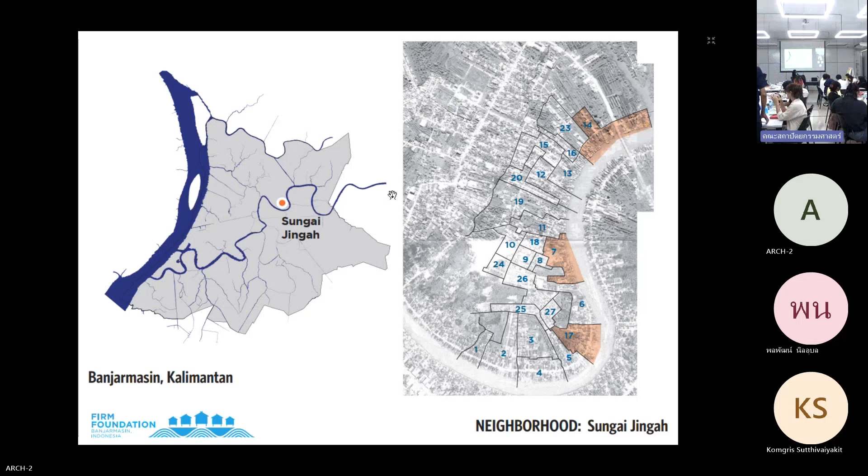The project is about how to build an amphibious design for the public space. The very important part of this process is participatory design, how the community can engage and contribute their ideas.

I became the lecturer assisting this project in 2010, when my students tried to submit it together with a professional architect from MIT in the USA. The method is quite a long process, because on day one, when they go there, they do key problem identification, with the neighborhood of Sungai Jingah.

How is the method? They sit together and discuss. What are they doing? They ask if there's anything interesting in Sungai Jingah, if they're facing problems there, and many questions related to how they manage their neighborhood, particularly for the public space that will exist near the river bank.

They try to find the key problem. They don't meet with just one community, they meet with several communities sitting together to try to identify the key problem.

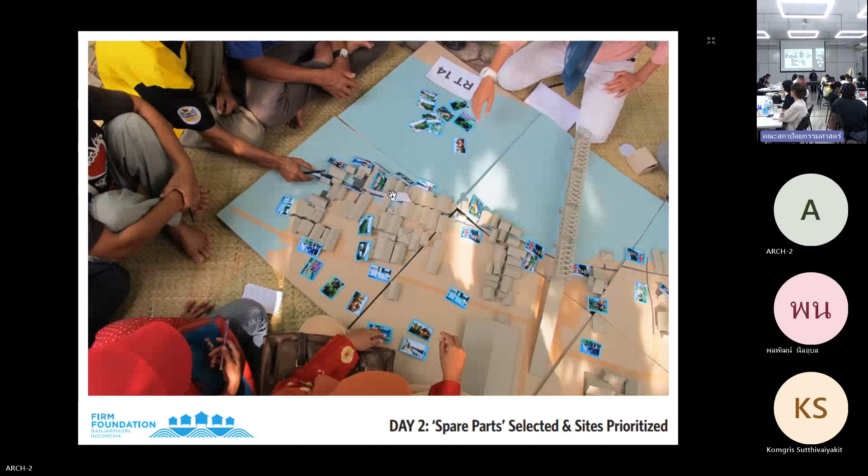Another interesting part of this process is they develop an interactive maquette. Why is this important? Because according to my experience with long-term community participation, when we try to engage the community to reveal their ideas about the neighborhood, it's very fun if you as an architect or urban or rural designer try to develop a maquette or model in three dimensions.

They will reveal everything through stories. It's hard for them to write it down, but when we build this kind of method, they can talk, probably not just one day, but two days. This means your skill as an architect student to develop the interactive maquette is very important.

Because it will be fun and playful, you can put the maquette and the model exactly at their location and try to trigger them with pictures, and they will talk all night long.

We call this the spare parts selected and site prioritized. Without this, I think they won't really know what the priority or problem is that they can really help with. After this, they talk about which is the first priority, second, third, according to them, and they can point it out on their maquette model.

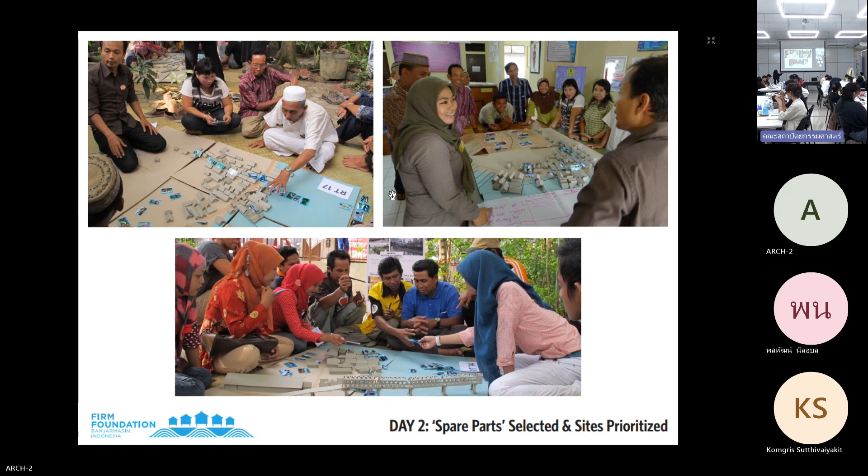The spare parts selected and site prioritized make it easier for them to speak through the model.

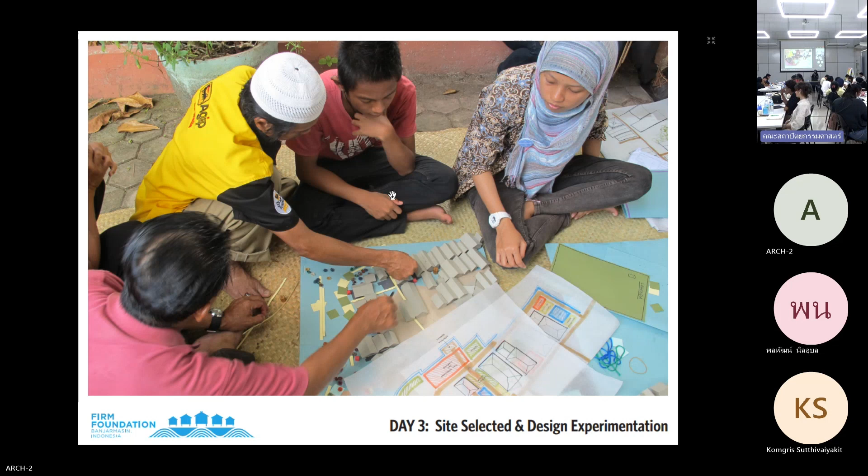Still on day two and day three, we move further with drawing. We let people draw what they really have in mind on day three, for the design experimentation. So we give them markers, give them paper, and let them try drawing by themselves.

This means we just act as a facilitator, as an architect or urban designer or whatever expert coming to their neighborhood. We just do it as a facilitator, because it will be easier, since the one who lives there is them, not us. We just come there and try to build something.

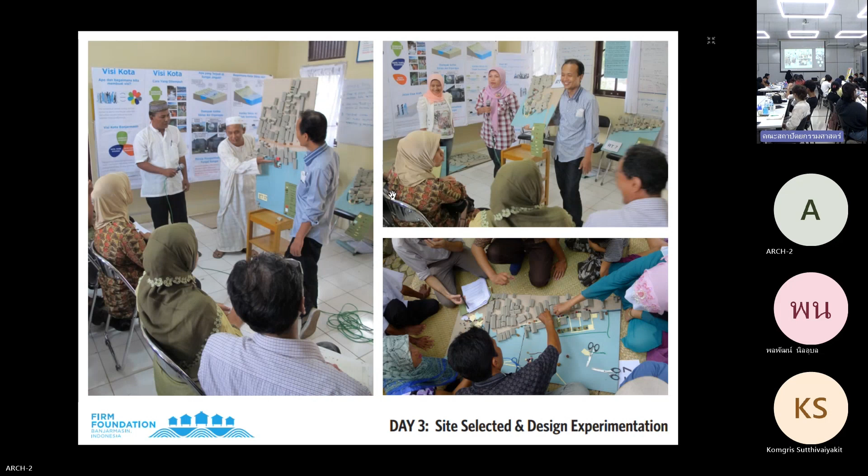It is also not ethical otherwise. The one facing the problem is them. We try to dig into the information about what really matters to them. This is the thing we need to do.

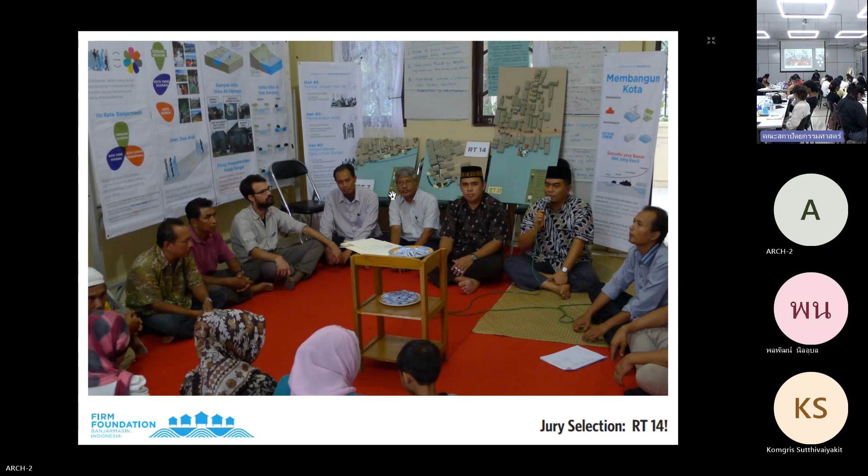After all the problems, they got the priorities in each neighborhood, and then the facilitator tried to explain to all of them, and when they talk together, it's very helpful for them to choose which area along Sungai Jingah is really suitable to build the public space.

Here the RT14 has become their site selection from the discussion with the community, because they feel this area is strategic since it's located at the junction. It's easily accessible from everywhere, and this area can be seen from the main bridge and the short bridge.

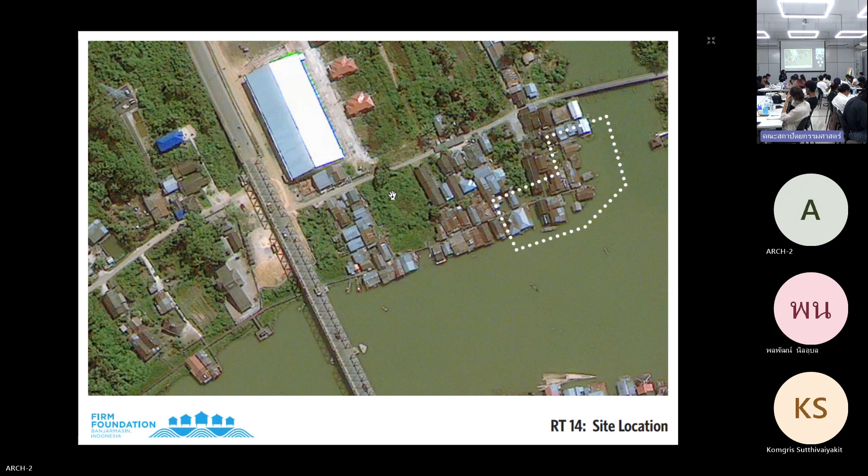What they want to do is build public space, since they lack it, using the approach of amphibious design method. They built this site selection through community participation.

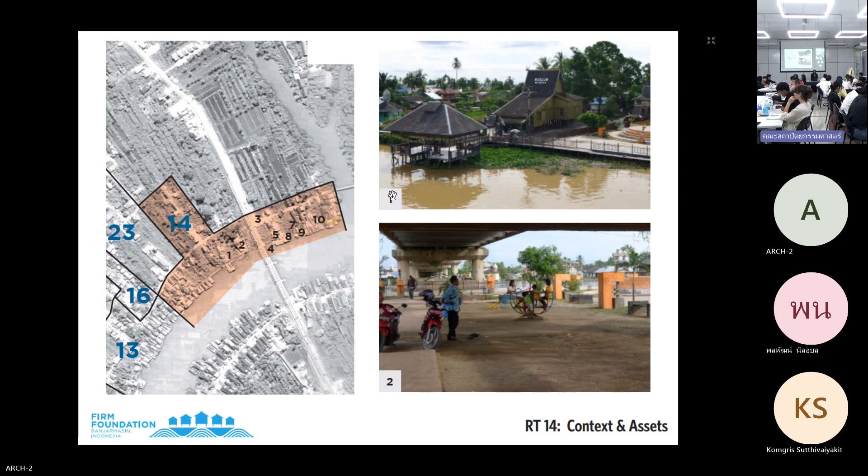Why? Because the context and assets in this area reveal a lack of public space. Most public space is not inside the water, meaning at ground level, and it doesn't cover all the neighborhoods along this river bank. Therefore, number 10 becomes a very strategic place to build the common space, and the area coming up for selection.

Here the potential they have, number 3, is about the garbage and the flooding - not actual flooding, this is in front of their houses. When the water level rises, the area in front of their yards becomes like a small pool of water, which is not healthy. So they have this kind of problem.

The fourth asset we can see from the mapping: they have a road made from wood, and they put many things from their houses onto it. This is common, I think, not only in Indonesia but also in Thailand, because the houses are not only for living but also for home-based enterprise and informal sector activities for daily life, part of which spills onto the street.

Achan has done very good research on informal street activities. They put all the things of street vendors also in front of their houses, even though the space is not big enough.

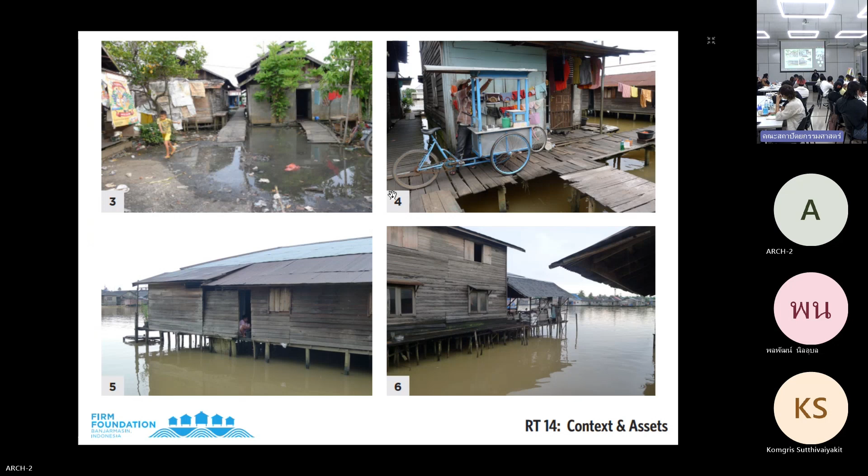The other things that emerged from this process: they did the discussion and mapping, and could point out which area has potential for public space. Most of the time they pointed here, where they lack common space for children - each neighborhood can gather, but it's very far away from the yard. So in this area, there's no position at all for public space.

After that, they found several key problems in this RT14: garbage in the rivers and roadside, helicopter toilets - do you know helicopter toilets? It's like a toilet with a septic tank, but they just dump it into the water, we call it a helicopter toilet. Also no PDAM along the river, broken boardwalks, and no port from the river to enter the community.

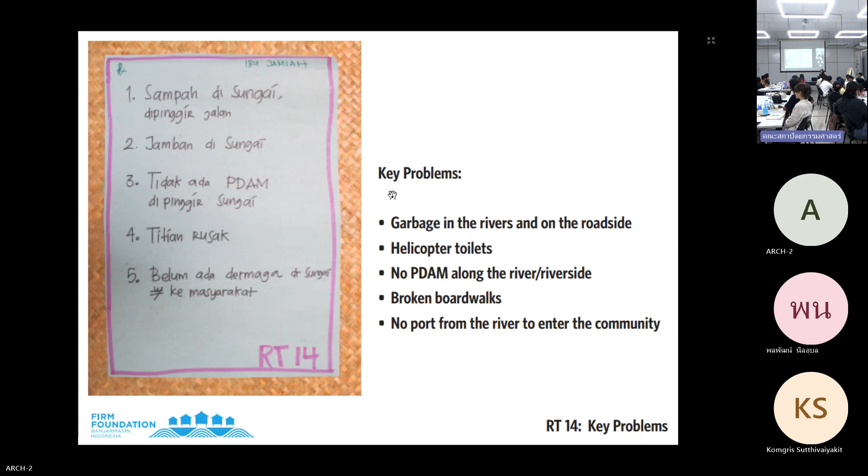All this problem was highlighted by the community, not us as architects, and it affects the community. Therefore, in these models, the spare parts include a boardwalk, garbage collection, green open space, plant vegetation, rainwater collection, IPAL, and a boat dock.

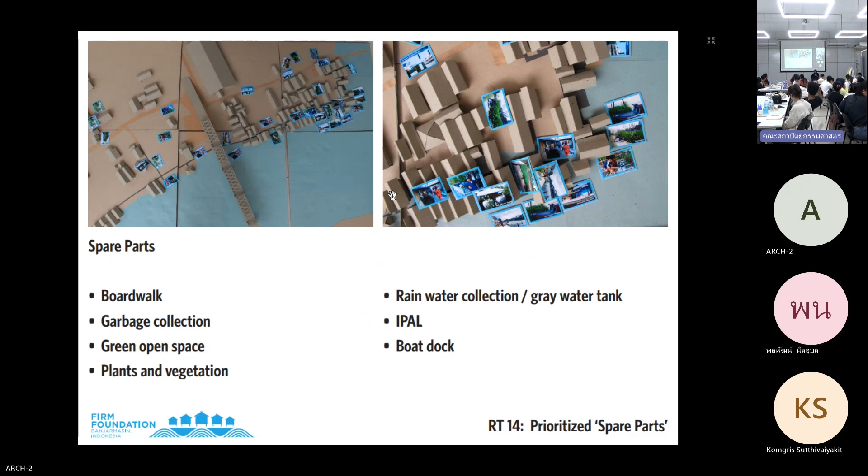The priority spare parts were decided from the meeting with the community, and then the next step was for us as architects and designers to do the intervention design. Probably yesterday the group four said that most of the time waterfront or riverside designs are not really attractive, right? So here my students tried to add a little design thinking for this strategic area.

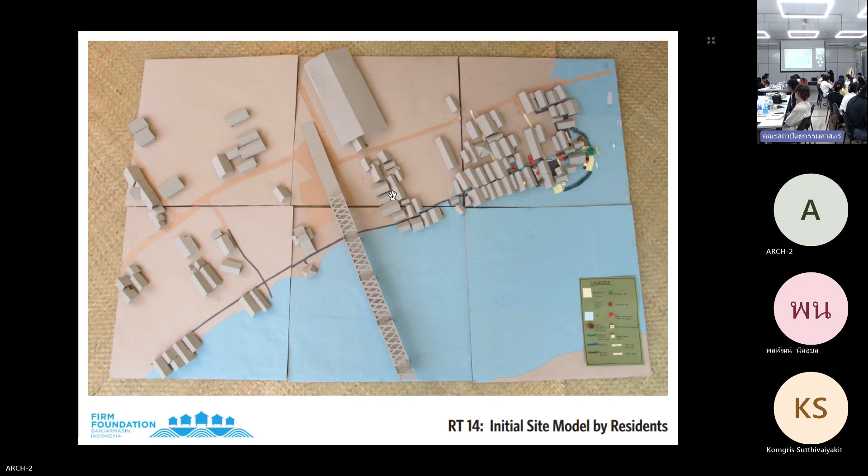Based on the problems revealed by the community, what they are doing is providing public space on the river. This has become their priority project.

The initial site model's basic idea came not from my students or the architects, but from the people themselves. They would like to make a connection from the residence to this area, so they're trying to build it by themselves with all the materials given to them.

They're trying this initial site model, built by the residents themselves, to connect this area to that area, meaning they want to create both visual and physical connections. They need public space not on the ground, but on the water itself - it will be much more interesting. That has become the basic idea.

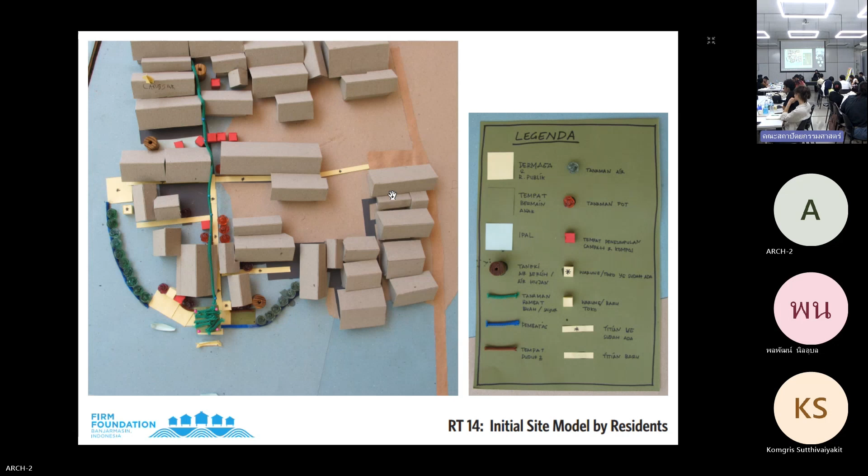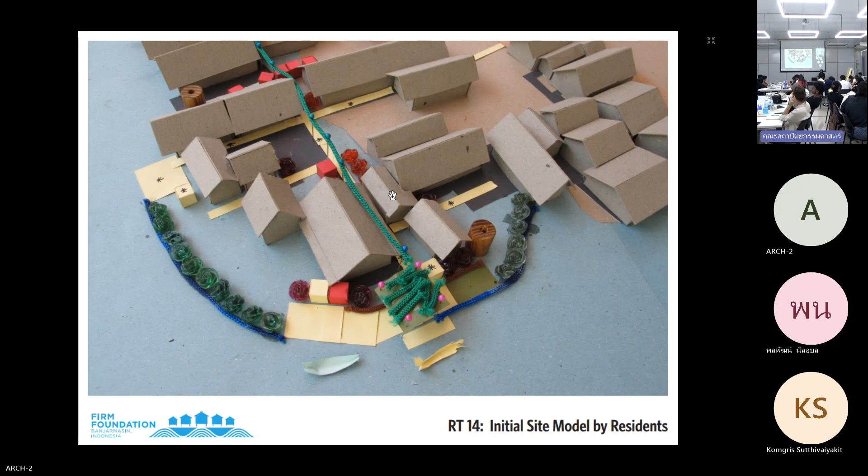Then you can see it's interesting because they put many things inside this space, since there are many things they want to do. 'I want this, I want that, I want to build the green barrier' because of the impact of the waves from the water.

This river is still used for transportation boats, and sometimes the big boats will create big waves affecting their community. So they wanted to make a barrier. According to my students, it's really interesting to know the idea from the initial residents.

Here's the existing site, there's nothing inside, but this space is really strategic. With their future visions, they wanted to build the community near the neighborhood for open space. It's really important also to ask the community to draw their houses, because then they really know what size and scale these houses should be, since they're living there. It's really nice right here.

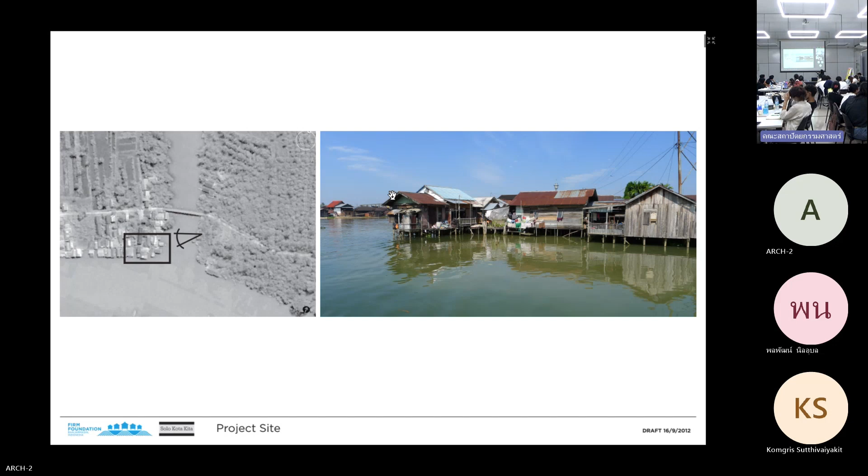The settlement also has a bigger scale, around 30, no, 40 square meters each house. And then this is the location that they choose to make the public space.

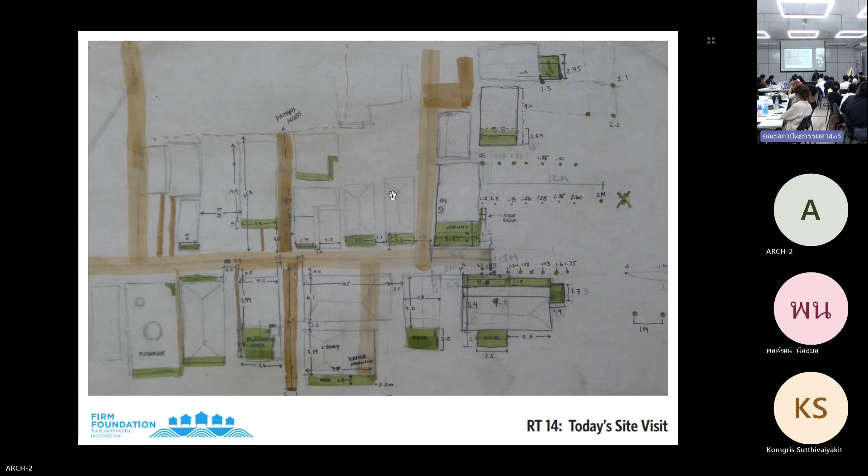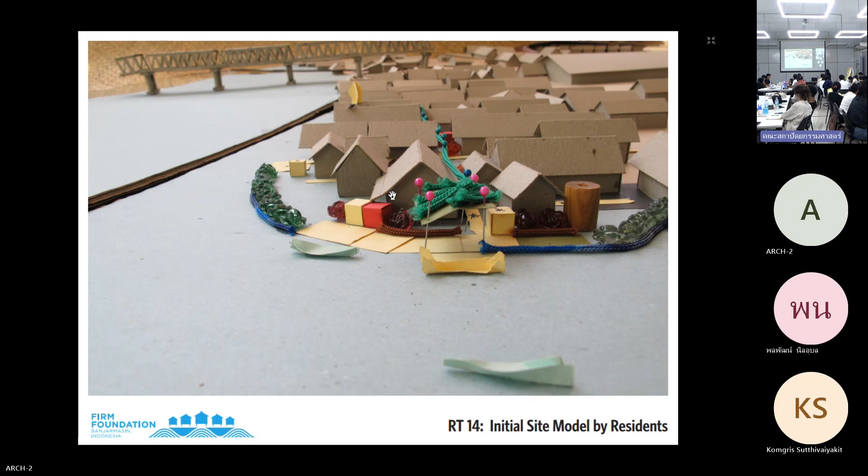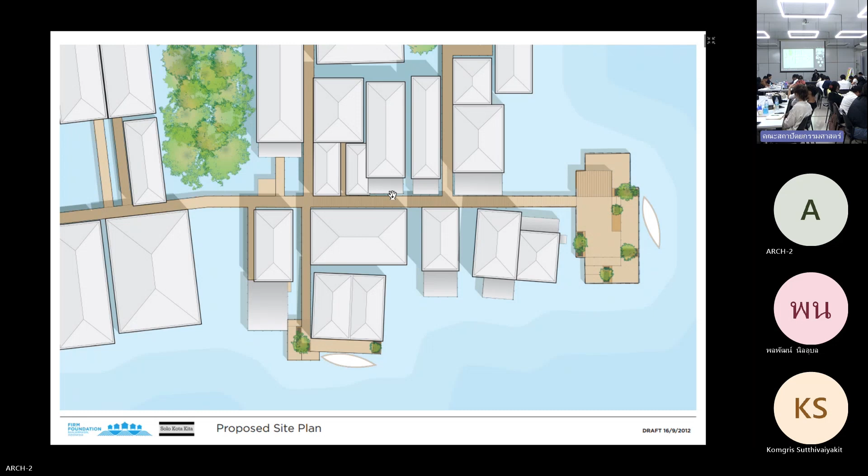What they reflect for the placemaking concept is they would like to have the water connection, and try to make this area positioned for livelihood space. So in this process, not all of the community's wants can be transformed into good design. Here our experience, our professional feeling comes in to articulate what they really want. So they cannot do a full connection, but they try to make one point to another point - we can say the revitalization space to make it a placemaking concept. What does this mean? Placemaking concept tries to make new activities that can trigger connected activities to other livelihood neighborhoods.

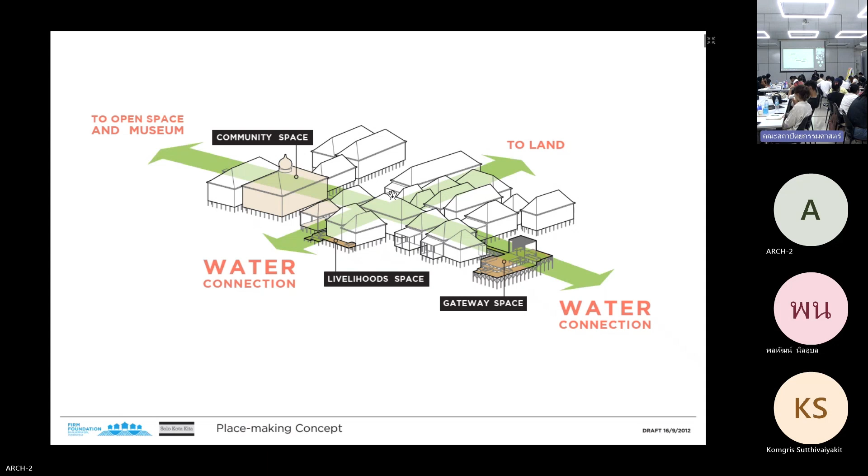Therefore, with the connect placemaking concept approach, the area chosen by the community was developed to be more lively, with a gateway space for water connections, going to the community space, with the livelihood space going to the land area. That's the concept they built, and with just a simple retouch, really knowing the good structure of the water concept amphibious, they developed this public space. And why did this win the competition? Because the team could reveal a good design without making it more complicated.

We can learn from this project that with only a small design touch, and by really understanding the local context and structure, you can generate and build such a design. So a simple design can affect everything. And the very important thing is it's very useful for the community because this whole process was chosen by the communities.

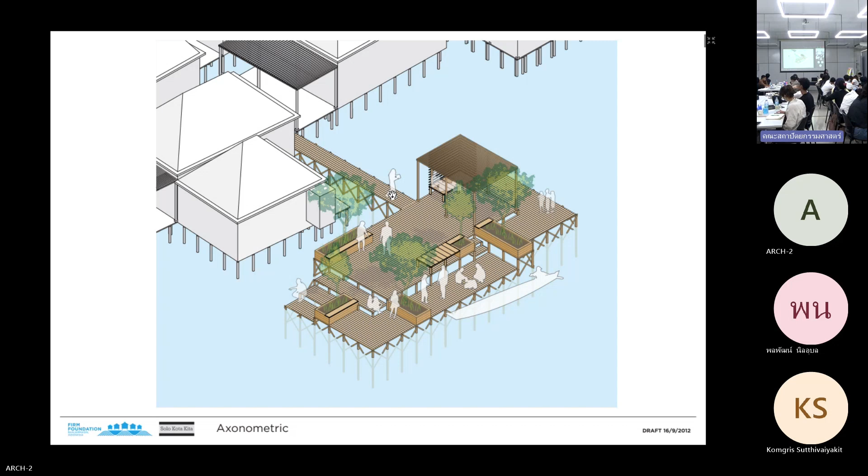We really know our client, we really understand what the client needs. They just need the public space, and we try to make the placemaking concept to connect previous activities to new activities. And all of this material is actually recycled material that they proposed for this concept.

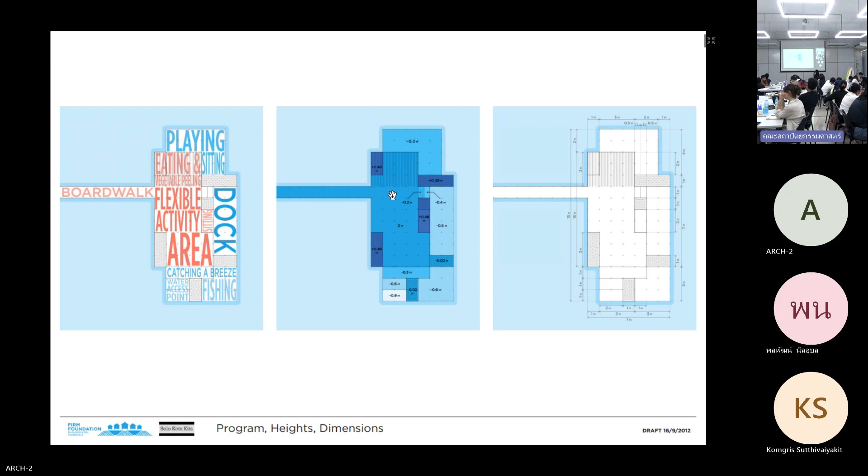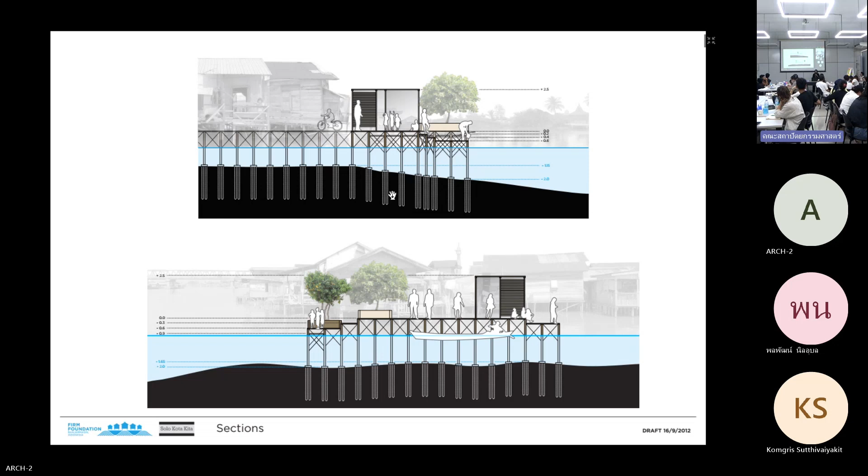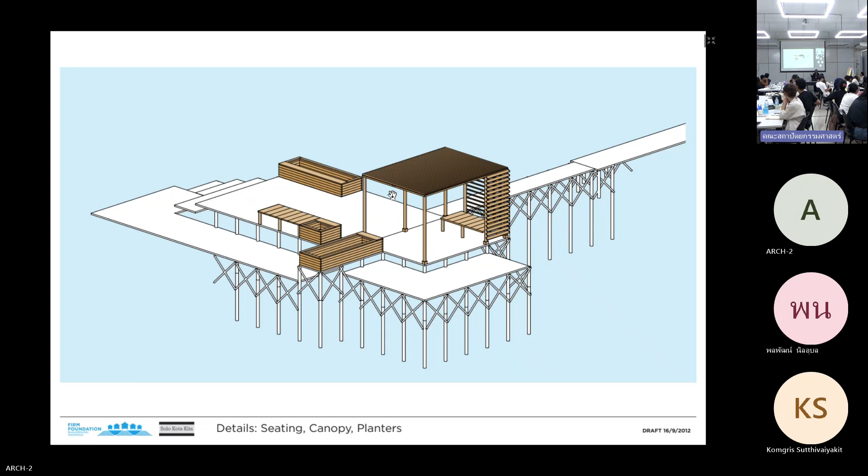How about the size? The size of this dock is for functions like playing, eating, sitting, with flexible activities. They need this dock to connect with other activities, so the dock became their choice, and all the material is recycled too. The concept of the dock comes from the structure concept of their usual houses. So with this idea, they hope the playing ground activities are served not only on the land area, but also in the water area.

This project was also built in 2012, funded by Firm Foundation. This is the rendering - they're trying to make it contextual within the neighborhood and surroundings.

I think that's all I can share with you about this concept of amphibious design. Thank you very much for your attention. I hope this project design can trigger you for this workshop to think about simple design, simple structure, not too much complex thinking, but to dig from the local context. That's very important, and you can find good value through conservation of material, structure, and lifestyle itself. I hope it's very useful for you, and yes, thank you very much.